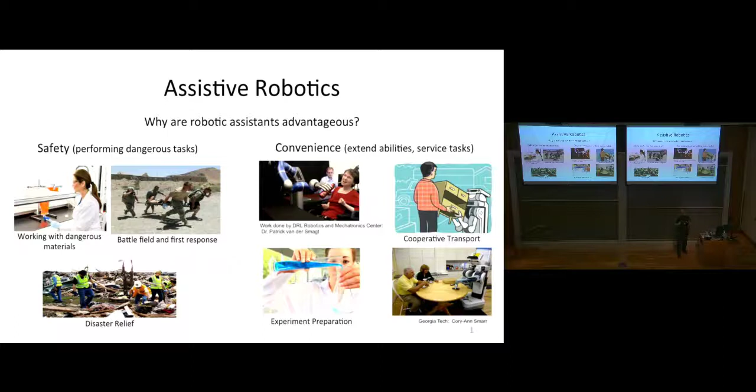So today I'm going to talk to you about robotic assistants and specifically how you can have manipulators effectively be robotic assistants. First I'm going to motivate assistive robotics. Why are they important? You can think of jobs that you want to make more safe. If you want to handle dangerous chemicals, maybe you want a robot that can help you carry something in a dangerous situation, a disaster relief or battlefield. Or maybe you'd like a robot that can manipulate things for convenience. Here you have someone who's paralyzed, and the robot is helping them have a drink of water. You can imagine carrying things, the robot serving you food, or experiment preparation. All of these scenarios motivate why you'd want these assistive robotics. This is actually a pretty old concept, but what they need to be able to do is perform complex tasks. They need to adapt to disturbances and poorly modeled tasks, as well as operate with high performance in new, changing, and dynamic environments.

This next video I'm about to show you was made in 2008, where they had a first robot from the University of Tokyo doing this.

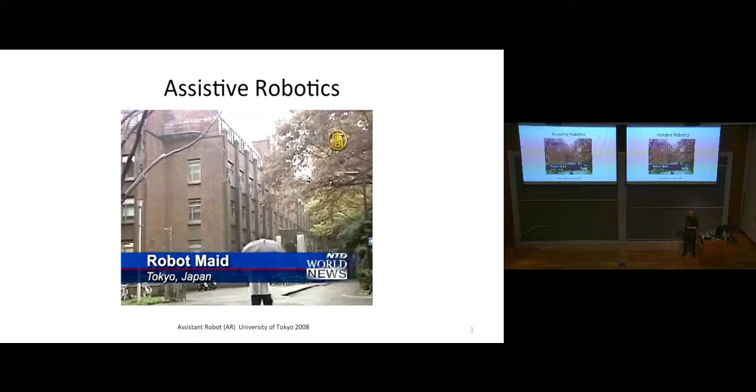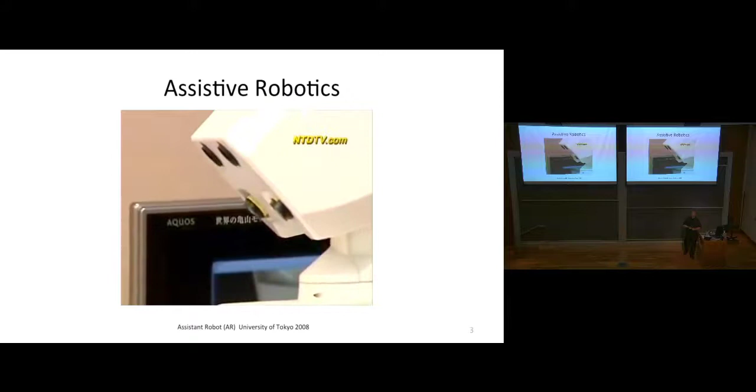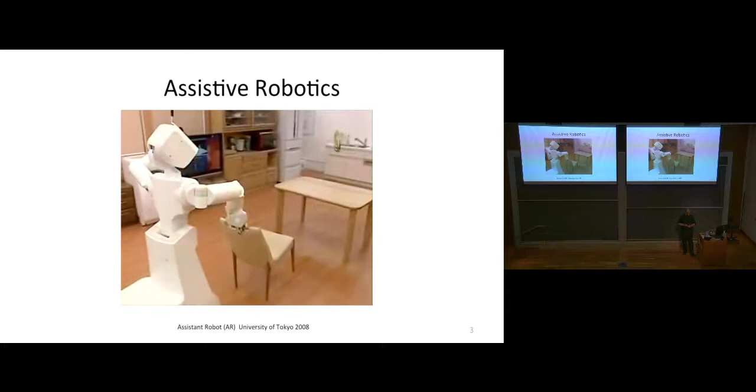Japan's top university scientists are studying the future of household chores, and their solution to mopping, laundry, and cleaning up the kitchen lies in the hands of a robot known as AR, or Assistant Robot. AR has a host of high-tech functions which are possible because the robot can see 3-dimensional objects. This is the first launch of a robot that will be able to help with household chores in an era of an aging population. We can show people we can do it. This mechanical maid is capable of more than just serving breakfast in bed, and at 130 kilograms, it's no lightweight when it comes to polishing floors. But don't get excited just yet. The research center says it'll be another decade or 2 before the 1.5-meter robot can be mass-produced.

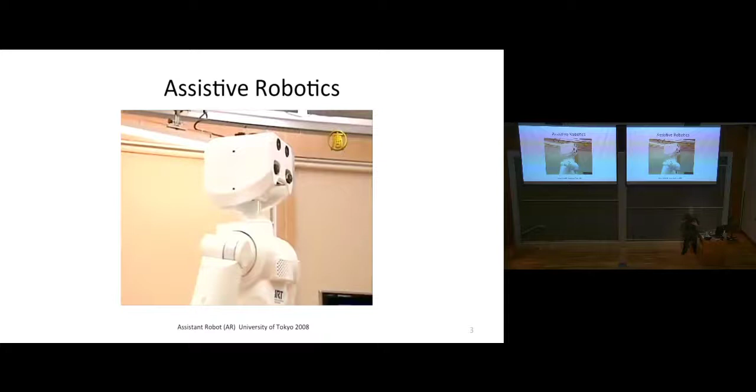So this was a great presentation of motivating why you'd want these robots, helping an aging population. But as they hinted, it wasn't quite ready. So I'll go to this next video.

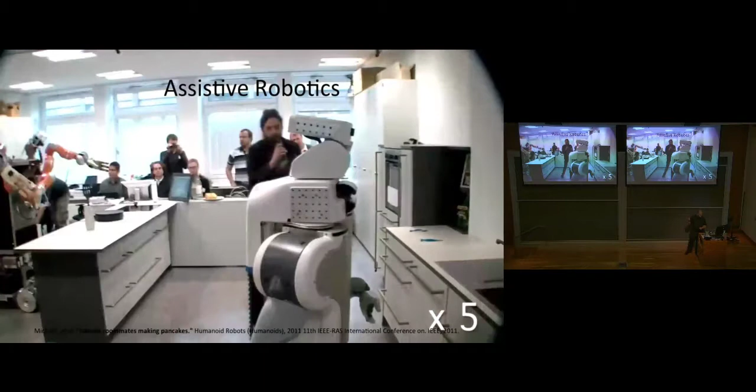Could you use a little extra help? Right, and this is fast forwarding a little bit.

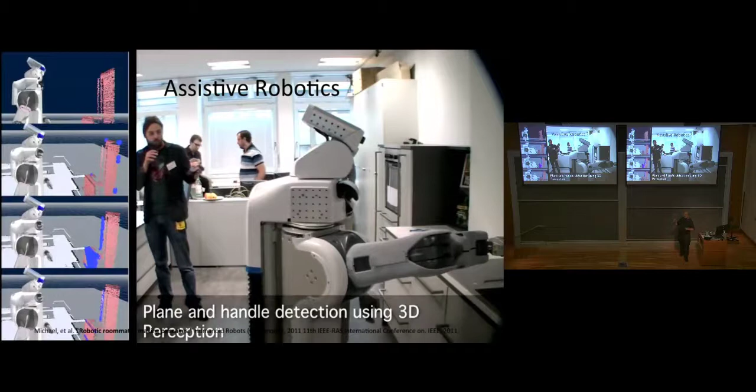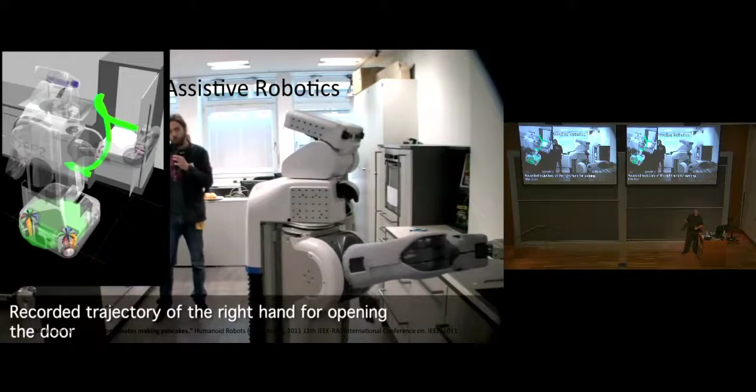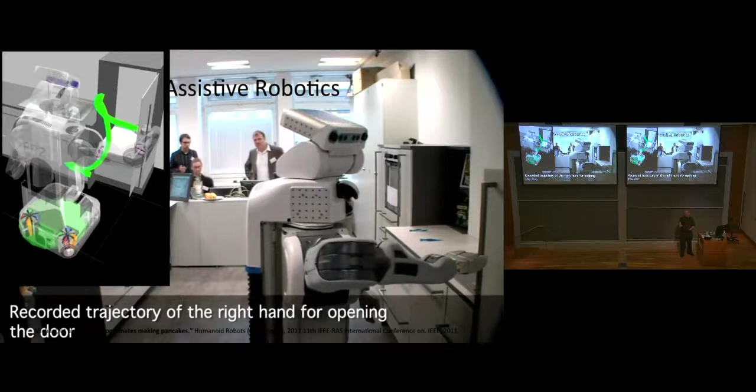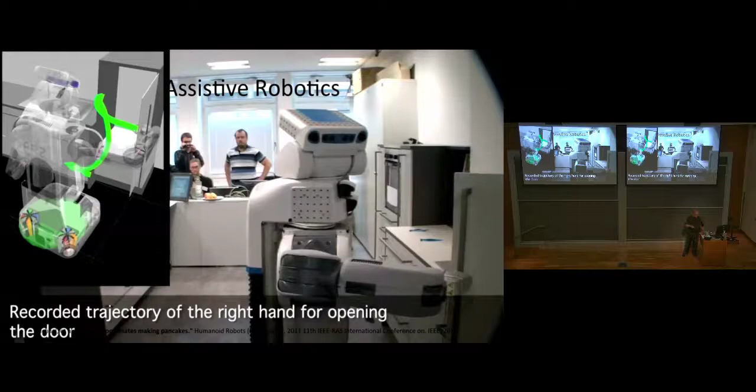So this was done in 2011, and the idea here was to have 2 robots work together to actually make you a pancake. For us, this is a very simple task, but you'll see how much time it actually takes this robot to do it. In this operation, they planned the path for the robot to open the door. As he discussed, they used a little bit of tactile sensing to help place the hand as it gets close, but the majority of the task has been really well modeled. They know where the door is, and they use beacons to help solve this issue. Here you can see the robot slowly open the fridge door after a few minutes, which would be a lot faster for you or I to do. So here, I fast forward a little bit to them having one of the early KUKA arms do flipping of a pancake.

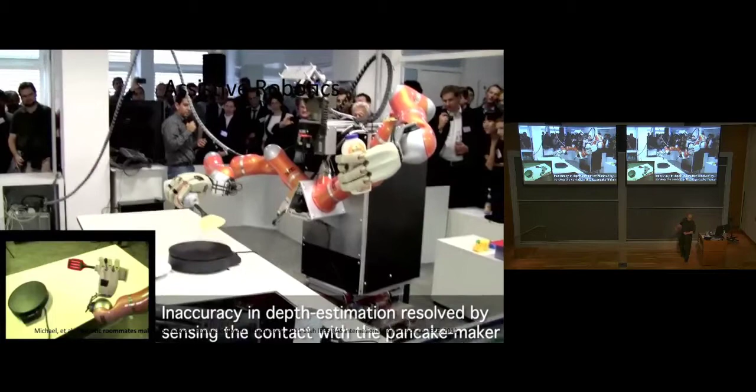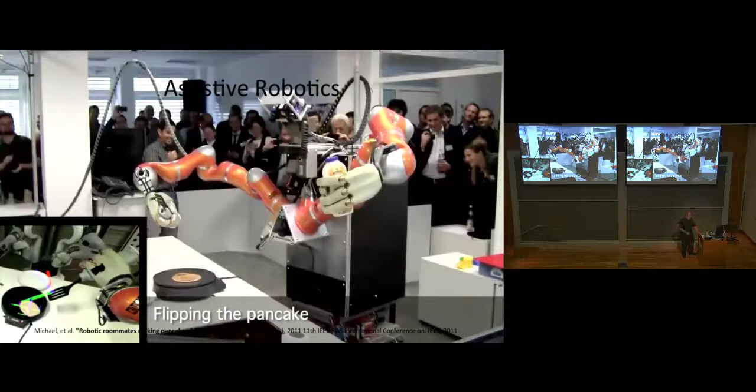They're so excited because we're able to do this seemingly simple task. If you actually work in manipulation, you'll realize that a lot of that was even open loop as they began to do that. They localized the pancake, but after they had it, they took a lot of things for granted when they went to flip it.

So this is a more recent application. At first, Tim was cooking his recipe, and his hand movements were recorded by our digital motion recording system.

And now the robot stirs the melted butter with a spatula. So what happens in this video is a chef actually mimics the motions that the robot arm needs to perform. But if you look very closely, these different containers are actually on little carefully placed coasters that keep them in place, and everything is filled to the right brim that it needs to perform this task.

So if you actually wanted to have a robot chef, it needs to be able to handle a lot more dynamic situations and not simply just repeat the motions or joint feedback that's given to it. So we want to make these systems more complex, more autonomous. So how can we do that?

You can think of many of these tasks that you'd like to be able to complete. And what's really nice is if you solve some of these things, some of them will have overlap between different scenarios where you'd actually want to use it and be applicable to multiple end users.

So we're specifically interested in the wet lab robotic assistant. How can we actually help the pharmaceutical scientists? We were approached by GlaxoSmithKline. They said it would be great if you could have a robot that could be introduced into the lab and help us pick up some of the things we're losing here in terms of time by having a robot that can assist us. So one was having a robot that could actually help prepare these experiments.

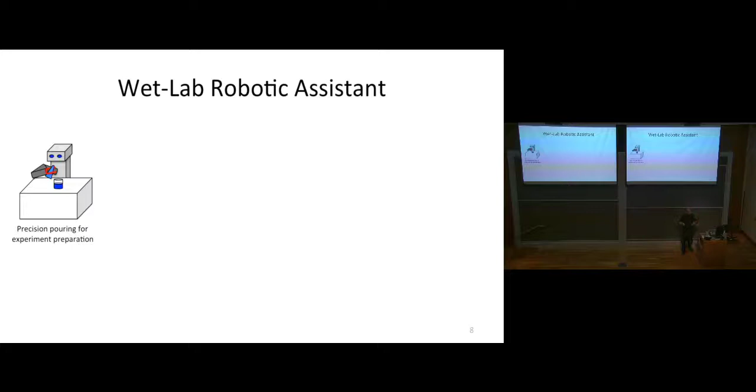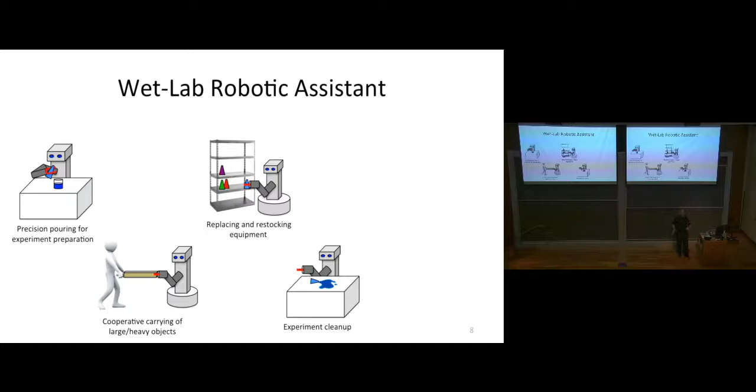Another case you can imagine is having a robot that could carry something in a cluttered environment. You can imagine replacing and restocking equipment, possibly experiment cleanup, as well as maintaining cultures while the scientists are away, for instance, on the weekend.

So in my dissertation, I tried to focus on just these two aspects, and these will be the focus of our talk: the precision pouring for experiment preparation. The main goals here are we want to be able to pour from containers that are already existing in the lab.

You should just be able to roll up and use their containers. You need to be able to pour precisely. You need to be able to pour quickly. And then you don't want to have a lot of tool changes. You want to be able to just use the manipulator you have so that you can transition to another task when you're ready.

So motivating this for the research lab scientists, we were told that when an R&D scientist prepares an experiment, they spend a lot of time simply pouring and mixing these buffers, and this actually adds up to 12% of their time. And when you're handling dangerous fluids, imagine hydrochloric acid or anything like that, it's great if you could have a robot that could step in, especially as the day goes on and the scientists could become more tired.

So thinking about the kind of things we know about the wet lab starting out, a lot of the containers are relatively symmetric. They're easy for people to handle. And generally, the scientists might have a decent idea of the fluids that they could be pouring from if that's what they're doing for the mixology.

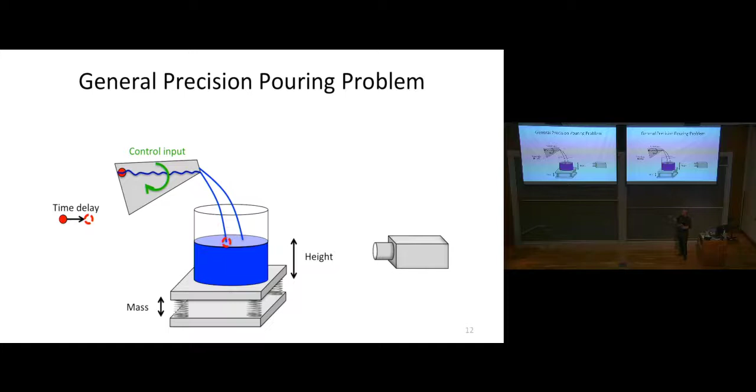So here's the general pouring problem. You have a container that you're pouring from, you have a receiver, and in our setup you have some way to observe the volume inside of this container, either using weight or using vision. And as you pour, this is actually a challenging task because there's a time delay that exists for larger containers, which we'll see in a moment.

But there's a lot of uncertainty at each level of this. How do you actually ensure that you're perceiving the environment correctly? How do you correctly model the task? And how do you model the transition between these tasks? And then how do you design that control strategy to execute that?

So a toy example here is fun. Everyone loves self-driving cars, so here I'm going to take the Tesla auto parking example. Consider this path planning problem: you start at A, you want to navigate to B. You have perception in order to see the cars around you. You have modeling and planning—this is pretty well solved. You have RRT Connect, you can plan one of these planners and get your path. And then you can control and try and move to this position.

However, in the state of the art, still a big challenge is the world is so complex. So how do we extract the state vectors that we care about to do this? Perception in this case is a challenge, but in the future work I'm going to show you—the work we're doing now—even the modeling is also a challenge and not well understood.

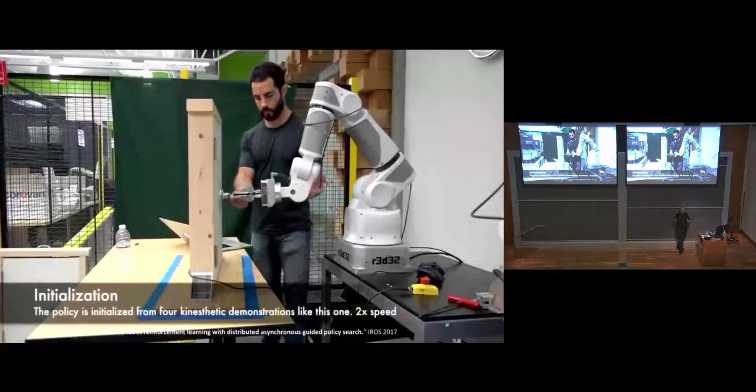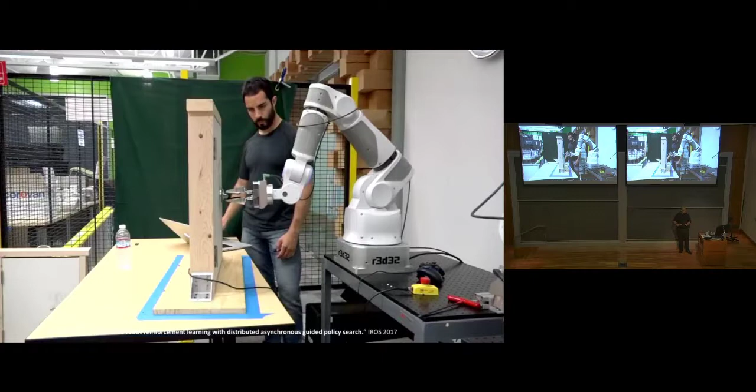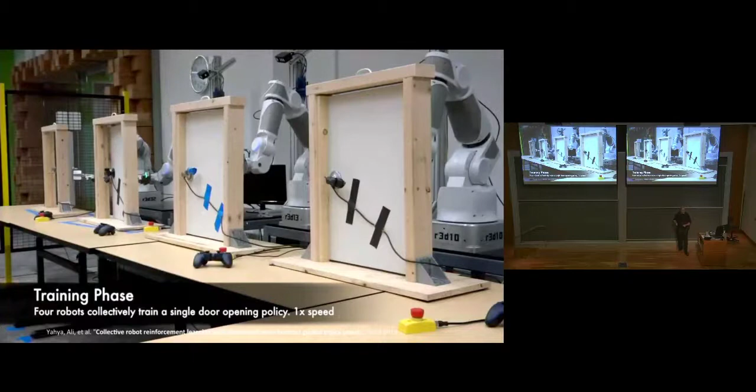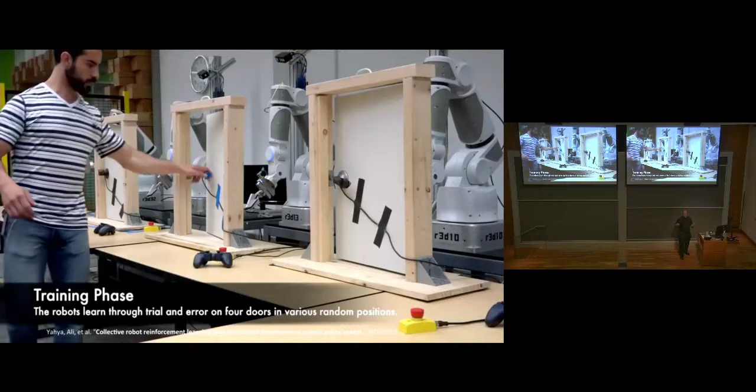So here, he trains the arm on what's the correct action necessary in order to open the door, and then he allows multiple arms to work together to actually open this. Success is measured by an IMU that's on the door handle, and they have a recorded sensing that they correlate with success for opening this door. By doing this, they can actually learn from their mistakes and learn how to do this particular task. However, a challenge they face is how do you actually make sure that this learned ability translates well to the general problem?

So now I want to talk about this in the context of pouring. Imagine you want to pour some acid from container A to container B. This is the initial configuration, you want to navigate to this. But you have to pour a specific amount, and you don't have multiple attempts to do this—if you mix these chemicals, you have one shot.

So how do you ensure that when you go to do this, you're ready to go, even if you've never observed this particular container before? How can you guarantee or give a high likelihood for that success? So to show you how complicated this problem is, I have this cute video.

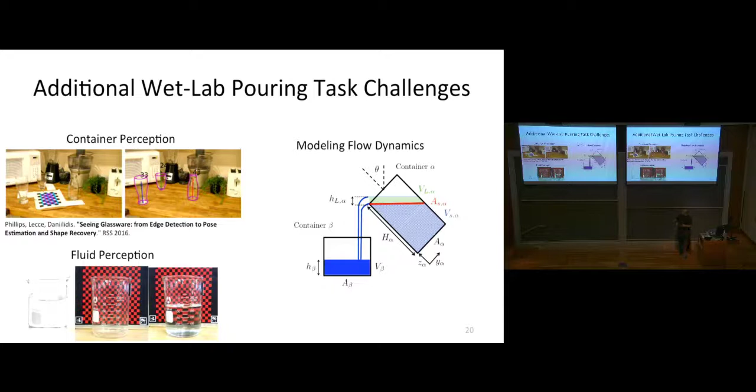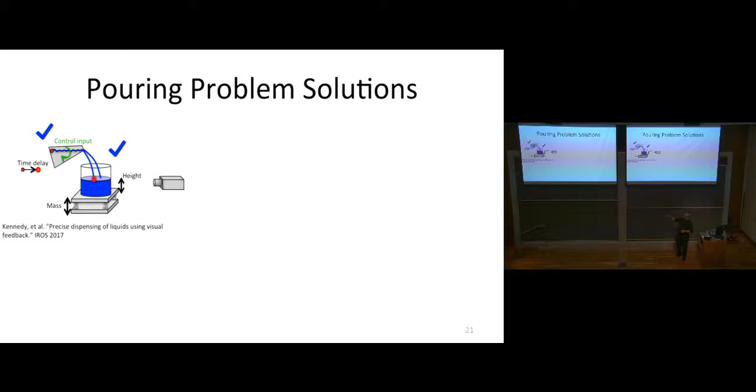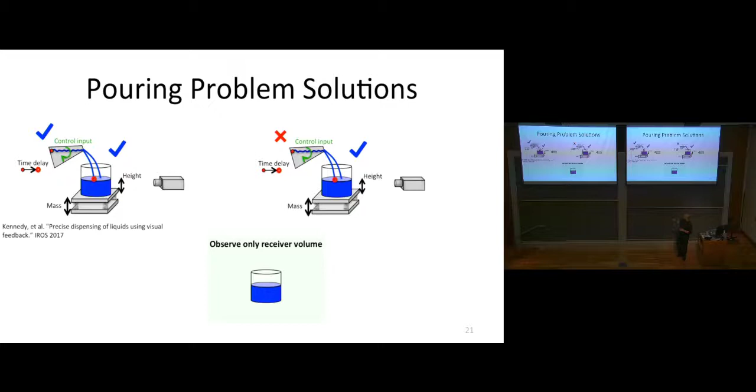I'm going to present the evolution of the work we did here. We started off with: what if we actually knew the model for both the pouring container and the receiver? Then, what if we only knew information about the volume in the receiver, but knew less about the container we were pouring from? What if we could only observe the receiver? And then, what if we could observe both the pour and the receiver's essential geometries?

Starting with the first case, where we know both container geometries, our assumptions are that both are known, no spillage occurs, the volume in the receiver is observable, and the time delay between the container falling and the water falling from top to bottom is known.

Because the geometry is known, we don't have to worry about the time delay since we can solve for it mathematically. So the problem statement is: what is the input u, or angular velocity, required to track the desired volume or height, given the receiver container's cross-sectional area profile?

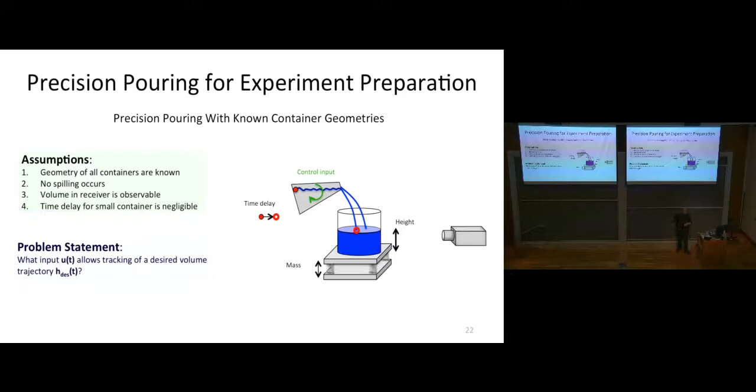Related work includes some done by Dieter Fox. His group looked at volumes in different containers—similar but not exactly our problem—in that he was able to classify 11 discrete volumes and use that for detection, as well as other work where he detected fluid in flight using a camera.

There's also work where they taught a robot how to pour from this exact container, with a target volume to pour into a receiver. This was demonstrated to the robot many times so it would learn how to pour from that container.

Finally, an industrial solution for a robot that helps pour these volumes is the Andrew lab assistant. This one uses pipettes, but it's a very cluttered environment that can't really work alongside a human, and it's not very versatile—if you wanted it to do other things like carry objects, it's really only focused on this one task.

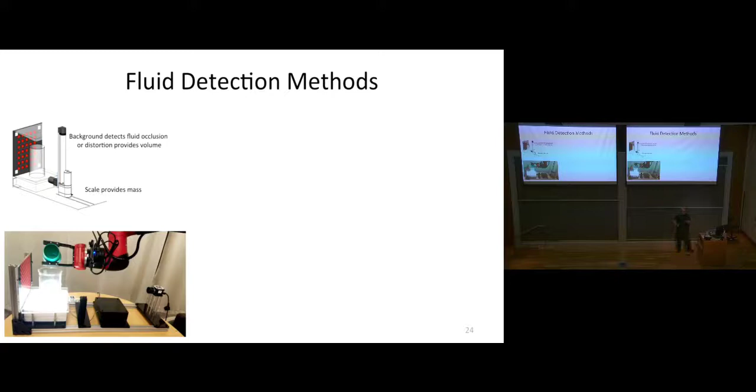For our fluid detection methods, we developed a platform that let us, first, get the mass of the fluid inside the container using a scale, and second, track the volume inside the receiver using computer vision.

We used a neural net—a fully convolutional neural network—that was able to take in that information and extract the water pixels. We combined these in a Kalman filter to extract both the mass and volume of the fluid inside the receiving container.

In this work, we used an MV BlueFox camera, the Rethink Sawyer robot, and a container that's actually square—this was because it was easy to model the flow from this shape.

So this is the original problem: if you have a time delay in the system but can account for it, then you have the height above the container, which determines how the fluid leaves it. You have the fluid below the surface of the lip, and this pours into the receiver. These volumes are captured in two equations—one for the cross-section of the receiver, and one each for the volume above and below the lip.

Doing this, we can model the flow rate of the container by differentiating our original flow rate model in terms of these parameters—the cross-sectional areas, and the derivative of volume with respect to the angle as it rotates while entering the receiver.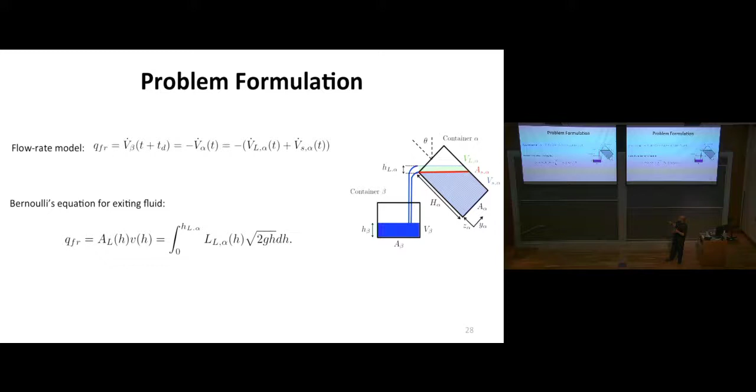With a known container geometry, we specify the container parameters: the length parameter on the container, the height above the pouring lip, the main height of the container, and its width and length on the side.

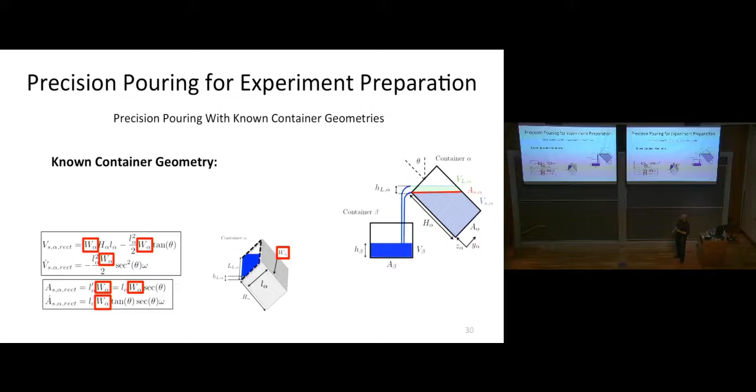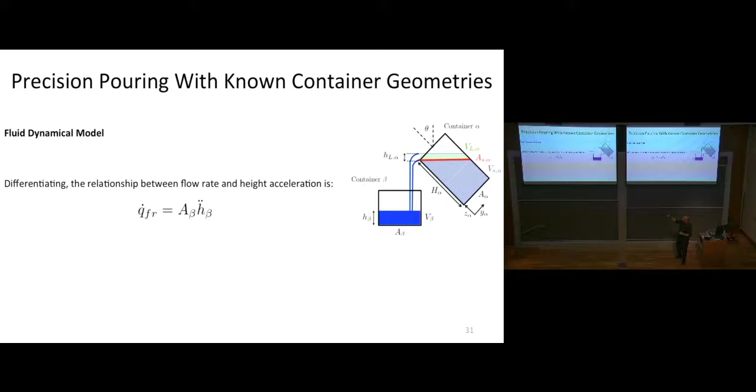With this information, we can begin to differentiate this model and estimate what the volume flow rate would be. Differentiating that flow rate model from the previous equation gives us this single line here.

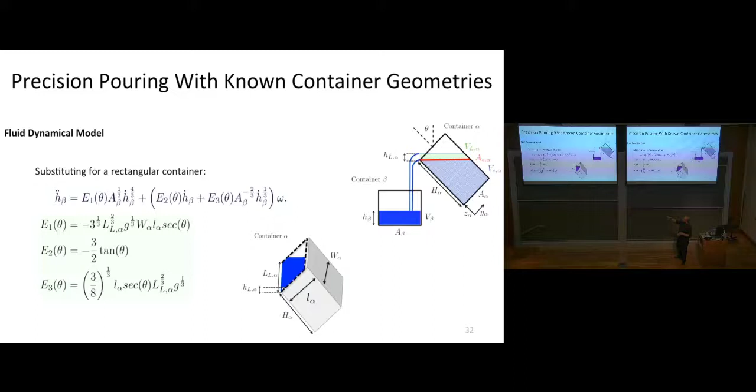So if we expand this and substitute our terms, which you saw for the container geometry, we have this as our complete dynamical model when we know everything about the container. So if we define our state space here as the height, the derivative of the height, and the angle of the pouring container, then we can write the equation we just saw in terms of this dynamical equation: x dot equals f of x plus g of x u. It has that really nice form.

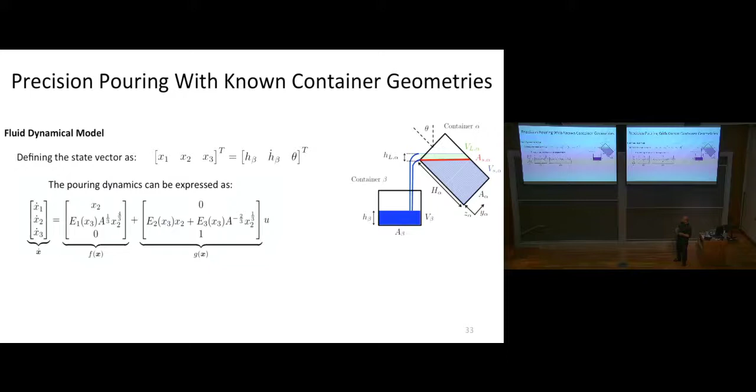And we care about the two outputs: the height inside of the receiving container. So if we define our error in terms of this output, the height and its velocity, we can specify a trajectory that is a fifth order polynomial, so it's very smooth as we pour to minimize sloshing inside of the receiver. And if we have the model in this form, we can show that it's actually linearizable.

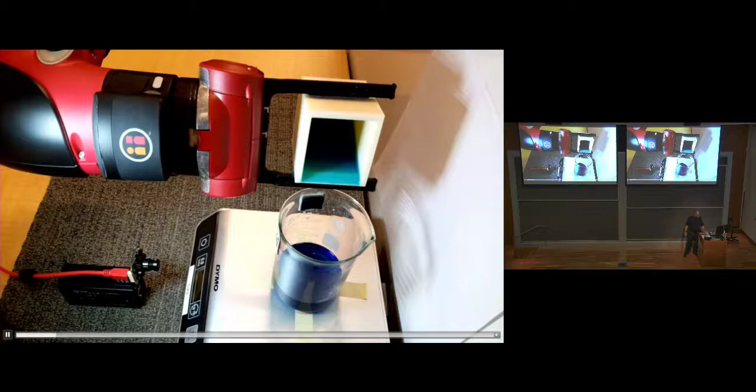So here you can actually see the robot begin to pour. I can speed this up.

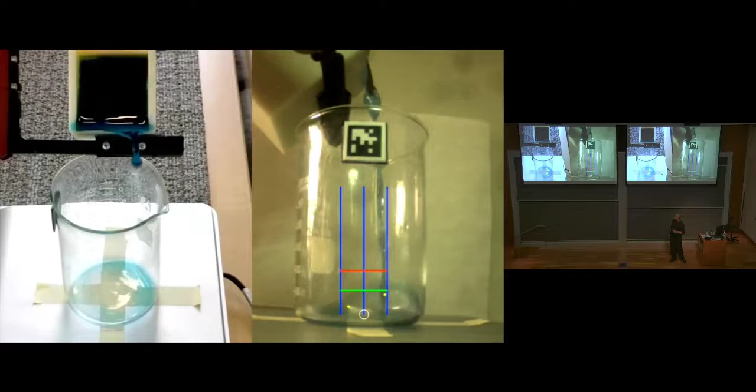So here initially we had to have the fluid as blue because we used background subtraction. But then in our later work you'll see that we applied that neural net to detect the fluid, and you can see that it's actually able to detect clear fluids of any transparency when you leverage the distortion of that background. So here we're actually able to pour very aggressively and quickly.

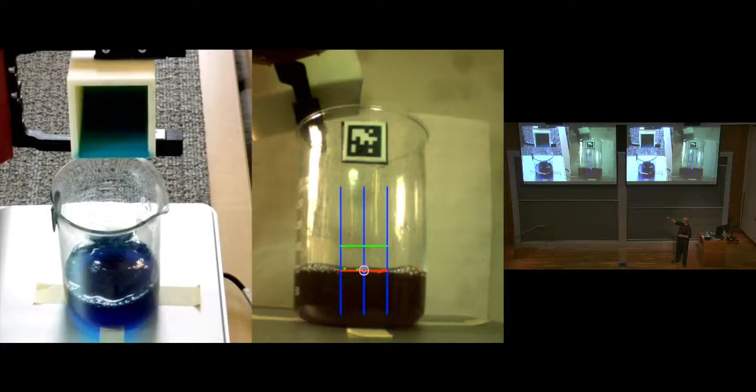The red line is the target line that we're trying to reach, and then the green line filters the fluid above that, and we're actually able to detect what we believe is fluid entering versus fluid rising, and use that to detect the mass or volume inside of the container.

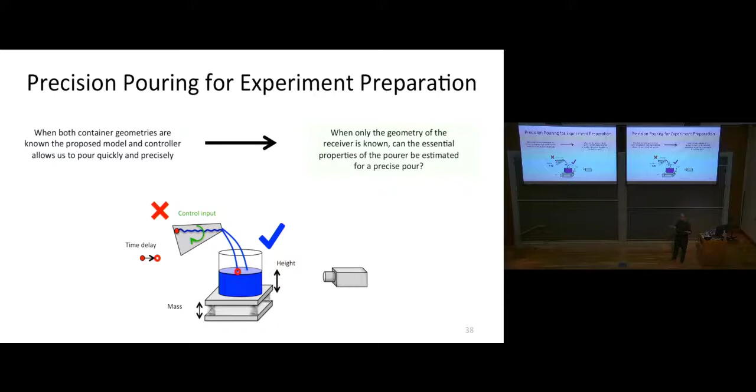All right, so this is the case when we know both the pourer geometry and the receiver geometry, but what if one of these is unknown? What can we do in that case? So we're going to move now to the case where we can only observe the receiver volume.

So here we adjust our assumptions that only the geometry of the receiver is known, no spilling occurs, and the volume in the receiver is observable. So then, given these essential characteristics, can we actually track the U that gives us the height that we want inside of the receiver?

So here the time delay is important, but in this stage of the work, we actually assumed that it was constant, so about a second. And then we actually showed that the results weren't great, because in reality, if you saw, remember when she poured the milk, that actually can vary depending on the angle you're holding it. And so later we learn exactly what that is.

So taking the derivative of both of these volumes, here we can actually restate our volume equation. Again, this is similar to the dynamics you saw on the previous slide. And then we have, again, we're looking at the height inside the receiver. We can actually say, if we have this time delay, that the future height can be observed by integrating all the actions we've done until this current point.

So this is our previous height. These are all of our actions up until the current time. What do we expect to occur based on everything that we've poured and acted up to this time, given our knowledge of the container? And so, in order to do this prediction, we need to estimate this derivative profile of the maximum volume profile.

So what is this maximum volume profile? Given a container, if I have the maximum volume it can have at this particular angle, it should describe some curve in this manner. So what's the max volume versus the angle?

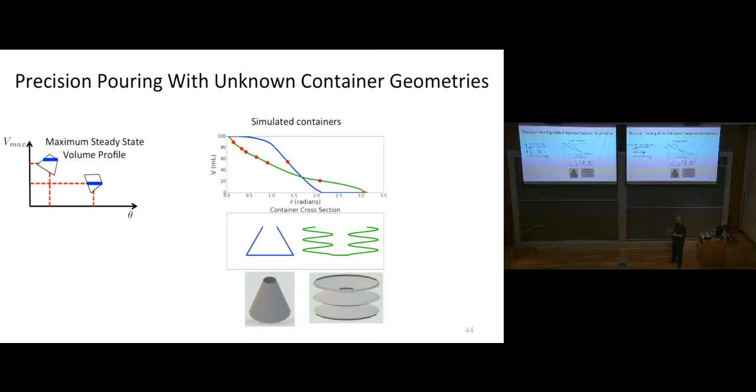So what we want to do is actually approximate this volume profile. In this work, we said okay, we're only observing the receiver, so we need to leverage information about all the example pours that we've done. So what if we model this with an orthogonal basis? We used a Legendre basis, but you could use any orthogonal basis.

What was great about this was it allowed us to use the coefficients to represent the containers as a point in space, right? So containers that are similar in geometry should actually cluster together, and then we can use that information, if we normalize them, to predict how we expect our current container to pour simply by watching how it behaves in the receiver.

So here's the objective function that we try to minimize. As we begin to pour the fluid, we're trying to approximate that volume curve. This is done with this residual. We have this weighting function which says okay, initially if I'm actually just starting to pour, I need to really trust the examples that I have, which were those practice pours. But as I pour more, I can begin to trust more the system identification as I continue to pour.

So here we have a similar state space. Our dynamics are slightly simpler. Here we have again the area of the receiver. This is the dV d theta. And then we have our output, which is just the height inside of the receiver. And we want to actually track this error at some future time.

And we show that the system is input-output feedback linearizable if these conditions are true, and they're pretty straightforward. So then here is our objective function. We want to track that error as well as optimize and figure out the container geometry at the same time, subject to the system dynamics.

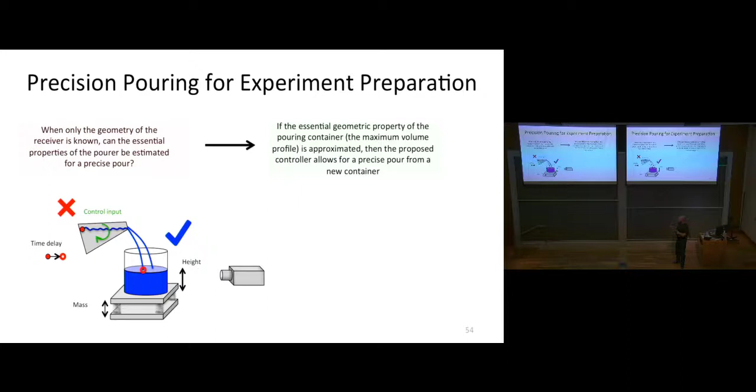We've been able to show that if you can actually see the volume in the receiver, then you can approximate that information and pour precisely. But there were some tricks involved—the main one was that as we did this optimization, we trusted these models initially, but as we continued pouring, we began to trust system identification more. So there were a lot of terms inside that optimizer we'd have to tune to make it adaptable to any system, and that's disadvantageous.

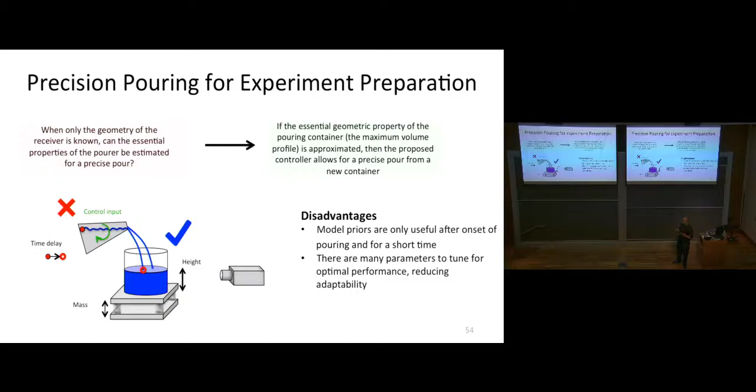So how can we actually improve this? This is what our latest work has focused on. Now we'll focus on: what if you can look at the pourer as well as the receiver? What can you say in that case?

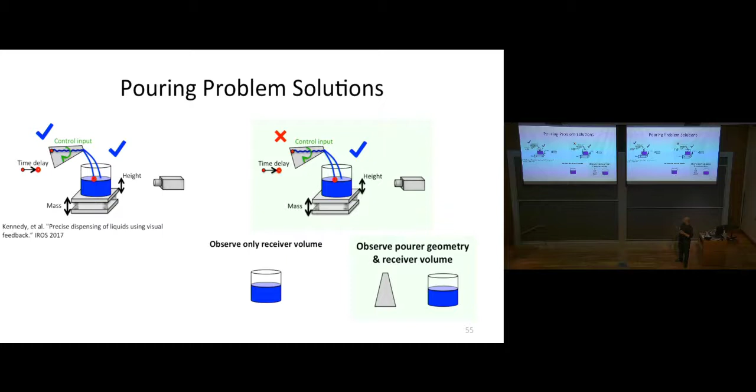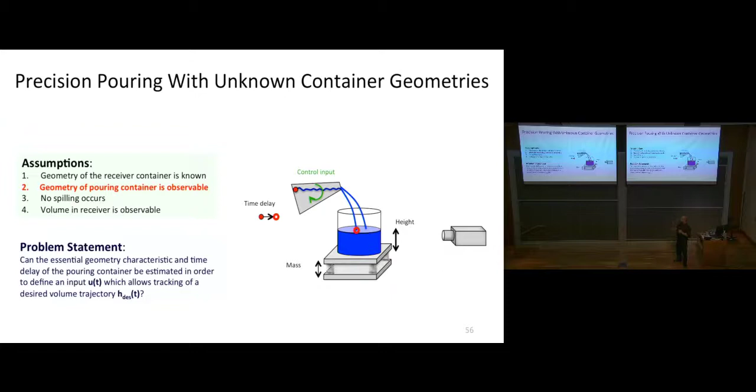Here, the key adjustment in our assumptions is that the geometry of the pouring container is now observable. Now what can you do? You have a similar problem statement: you want to find the input velocity to reach that target volume.

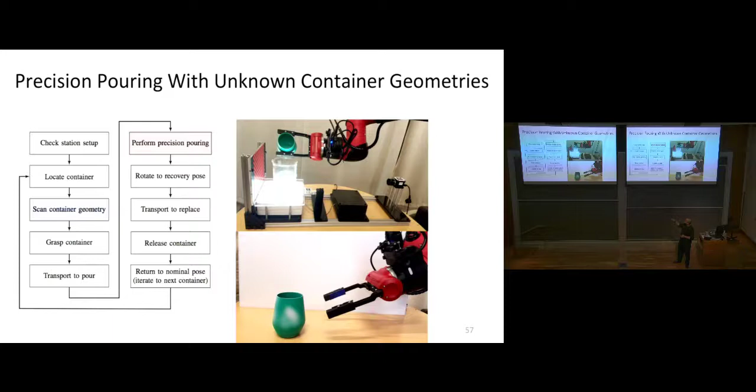Here's our full system state machine as it matured, and we'll have a video showing this done at the KUKA Innovation Award. The highlighted parts here are the scan container geometry and performing the precision pouring. Here's our complete setup: first, the system scans the container, and then it pours it inside our objective.

Now this is the simplest form of this dynamical equation. Here you have the time delay in the receiver after some time TD—you need to know what that is. This is the velocity in the pour, and we're going to use this notation to represent that volume profile, V sub theta, and this is its first derivative with respect to theta, and then this is our angular input.

So now if we want to think about what the time delay is, we can think of it as a function of the container geometry, the angle at which we're pouring, as well as the angular rate at which we're rotating. Our objective is still to track some desired height in the receiver that we specify.

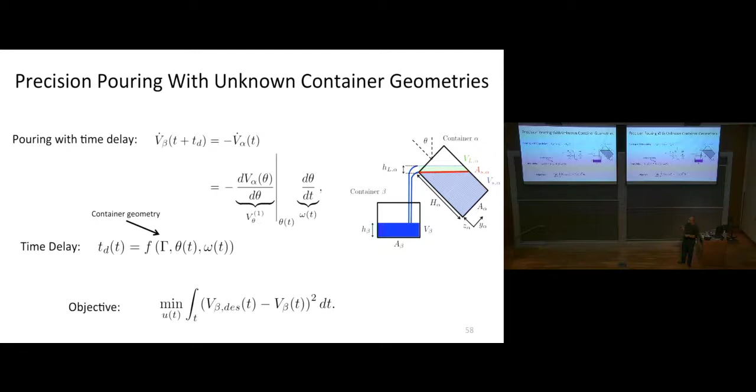For actually extracting that container geometry, we have the sensor setup here. We have a time-of-flight sensor, the PicoFlex. It's able, if you have the right color for your container—here we had to use white paper—to get a really nice point cloud. If it has the wrong material, sometimes it's actually spotty, so we can continue to improve that.

With this, we're able to extract the point cloud and reconstruct the geometry of the container by estimating a set of cylinders at different heights. After getting RANSAC for the table, you get the table normal, and then you subdivide that and group these points together. You can construct these cylinders and then fit a Gaussian process to this.

What's really important to note is that when we fit these curves, which is useful for comparing, we always fit them with the same number of points, 128 points, spread out over the height of the container. This is useful for comparing against simulated containers, which we can also get and extract that profile for.

So here we're actually pouring some fluid inside of NVIDIA FleX. We have the same particles, but then you can render this with the fluid. If we have thousands of these containers—we poured 3,288 of them—then what we can say is, what are the top 10 containers closest in geometry to the container we're pouring from? After we extract our profile, what are the closest ones, and what percentage match are they?

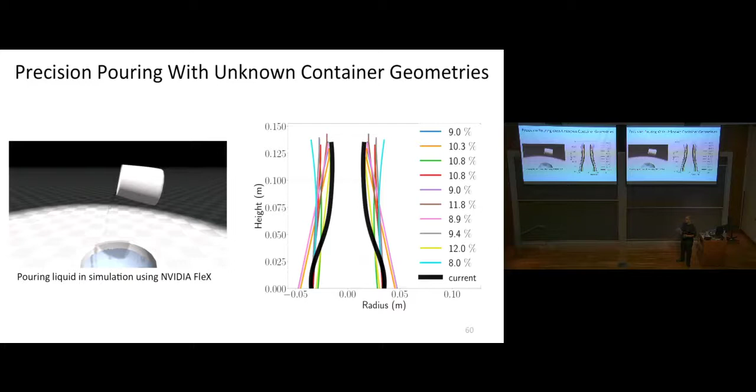Once we have the profiles from these simulated containers, we can use a mixture probability to estimate how we believe our container would behave if it was actually close to these simulated containers.

Here's our control diagram. We have the model which we're trying to estimate—what is that volume profile, what is that time delay? If we can estimate those, we can control our input to reach that target volume, where error is defined as the difference between desired and actual volume.

We want to effectively combine online system identification, which we did in the previous work, along with sufficient model priors that we can use from the beginning to help us pour quickly and precisely.

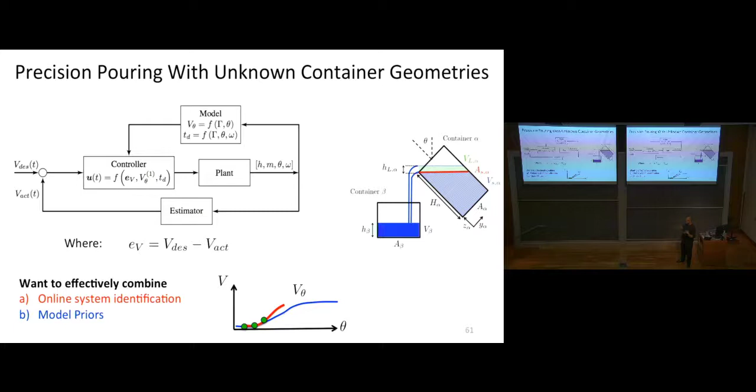So for system identification, now, because we're actually going to do this in a different space, we transition to power series. It's not necessary that the coefficients be orthogonal. And we want fitting for the system identification that minimizes this objective function. So again, minimize that residual as we pour.

We want to have a regularizer so that our curve doesn't diverge. And then we want to have soft constraints because the physics say as you pour it into the receiver, the volume should never go down, it should only go up.

So then for the Gaussian process side, if we want to compare these different methods, we don't have to use just the online system identification. What's the model prior aspect here? We use a Gaussian process.

So here's the kernel that we use. It's a combination of a radial basis function with white noise. And the variance here is a function of how well our container fits to the container that we're comparing it to. So given this information, we can define these covariance matrices, which are a function of the angles for both of these, the training and the test container.

You can then construct the information matrix, and this is textbook, and then you can actually have this non-parametric estimate where we combine each one of the fitted volume profiles using this mixture probability that we obtained. And this is in addition to accounting for how close we are to the container.

So if we're really far from the container, this variable becomes very large, right? And then this kernel gets very large and there's disassociation. And so you'll converge to your mean in that case. And if you're very close, this will become very small and you'll be very tight to your mean. And this gives our new algorithm the ability to be very adaptive.

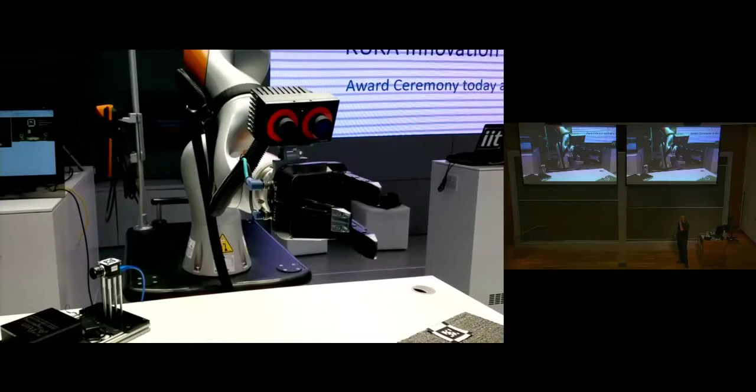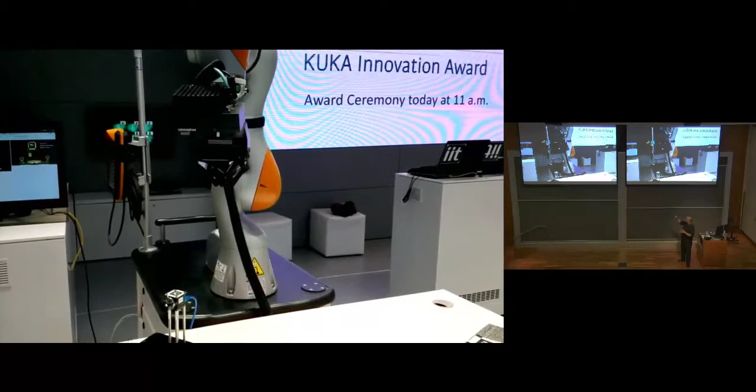KUKA Innovation Award. We scan the geometries, begin to pick it up, and then pour it. In the interest of time, I'll show you the main video, which you might have seen before.

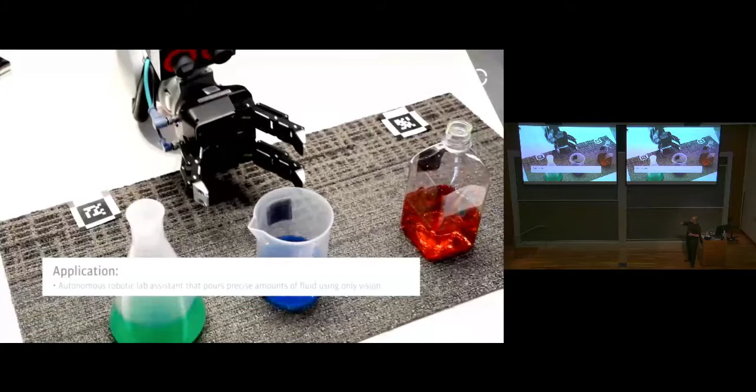They did an amazing job with the video. You have an interface, you select how much you want to pour, it scans the area, picks up the container of interest, and transports it to the region where you want to actually do the pour. You can see our system set up here, and in a moment you'll be able to see the output.

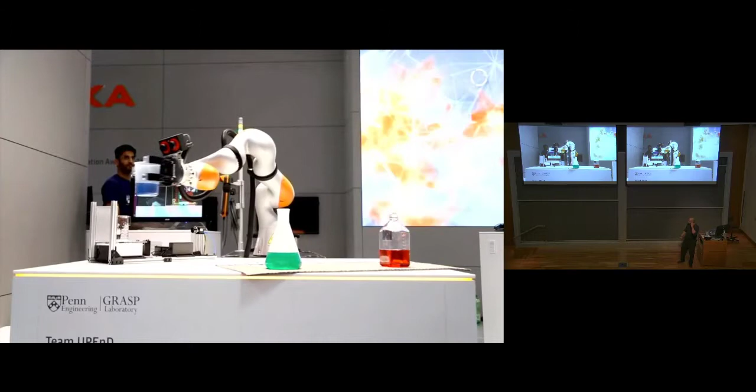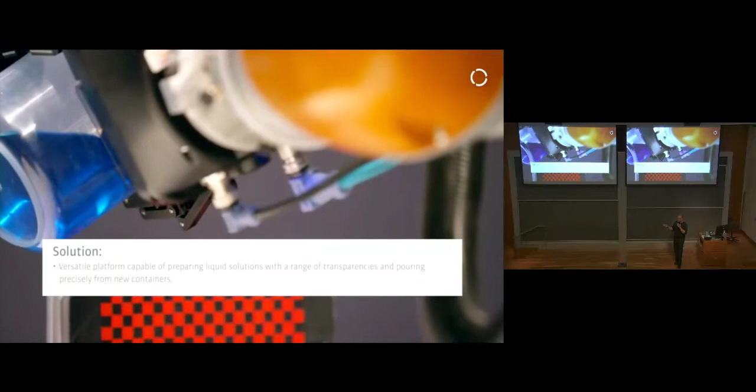So it begins to pour, initiating that pour. Once it figures out what it's doing, it begins to speed up, and it actually looks like a person would — it starts to pour, then backs off, then figures it out. But every single time, we're able to pour precisely using this system identification.

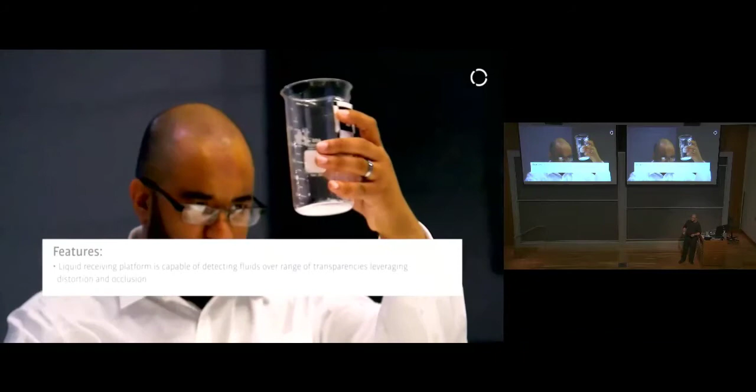And then we simply motivate why this is good for a scientist. I've been told that I look like someone off of Westworld, but we'll ignore that.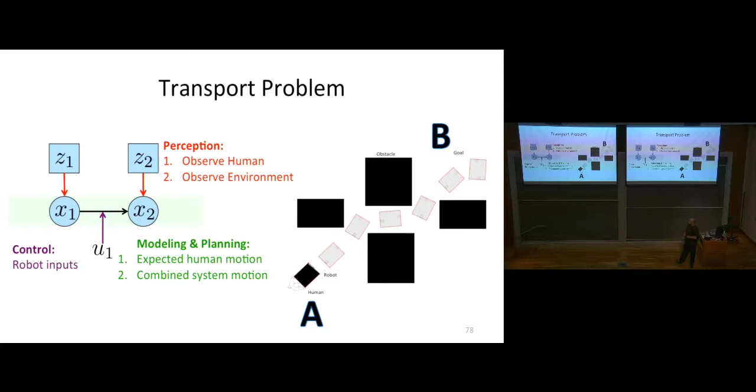So, transitioning quickly to carrying. This is another useful task we could have the robot do. Again, we consider this scenario: you need to measure your environment, observe the human, model the human, model the combined system's motion, and then figure out what the robot inputs should be in order to execute that motion.

So if we wanted a robot to help a human carry something like this, how could we actually give the robot the ability to know what to do in a similar fashion?

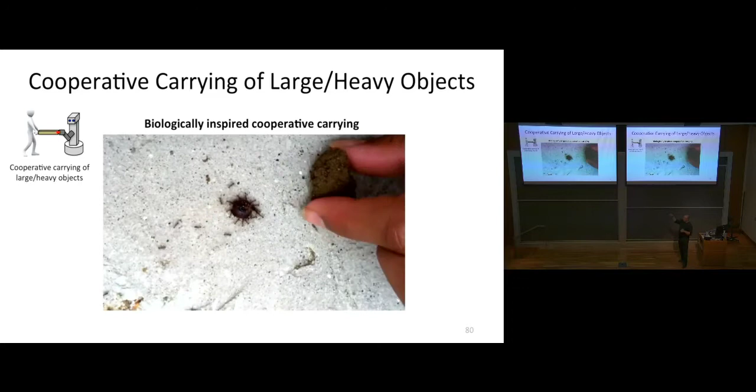So our first step was to actually look at how ants would do something similar. Here you see all of these ants carrying this thing, able to avoid obstacles — the ones closer to the obstacle are like, hey, back it up, and they're able to push it and navigate without striking that obstacle as they move toward the nest. So, ants can do it, we can do it, so robots should be able to do this.

So these interaction forces, or the stresses they're producing on this object, they needed to minimize, and if they could do this, that kind of defined what optimal transport is. So we define optimal transport as going from pose A to pose B while avoiding obstacles and conserving energy.

So the first step of this is, okay, let's say I knew where I wanted to go — how do I actually plan the most logical path to get there? This is a good problem, and we did work here that actually augmented this by having a system.

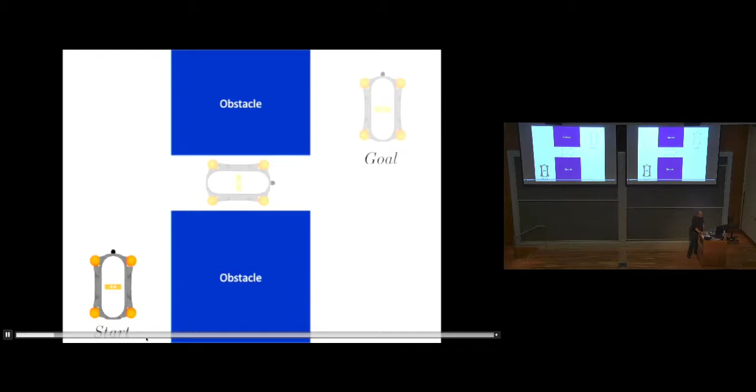If I can fast forward to the part here — that allowed us to construct safe corridors that the robot could traverse through, which really lent itself to the path the robots were trying to follow.

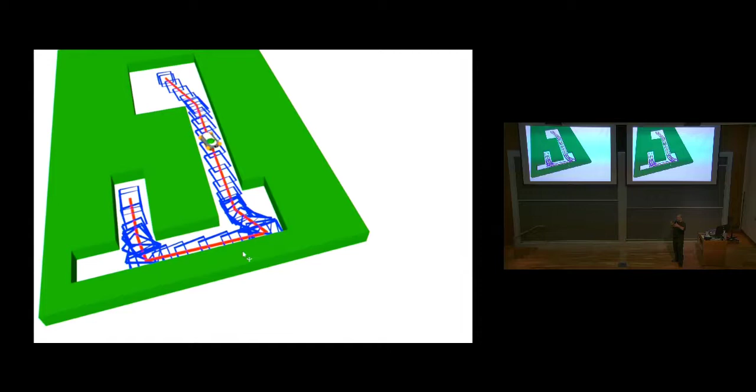So here you see each one of these nodes generated from a seed path generator — you can imagine like a sample-based planner — and then you construct these overlapping convex corridors, and you can plan nice, smooth, optimal trajectories in that space using those corridors. So if you know where you want to go and you know your complete environment, you can plan a safe trajectory to get there that doesn't have any collisions.

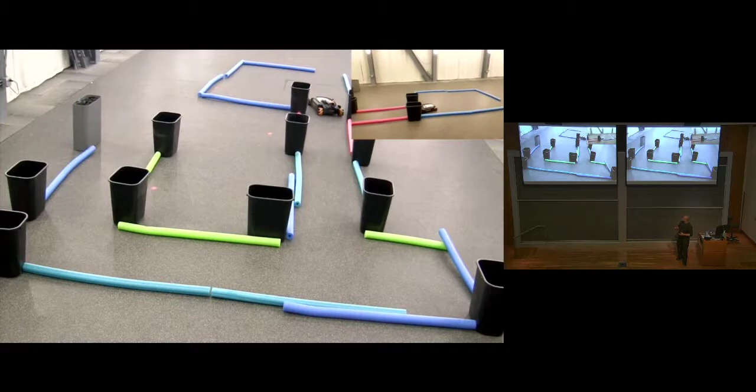Given these interaction forces, we want to minimize them in order to be optimal. Work done by Vijay and Waldron showed that if you have this wrench, you can look at the interaction forces, and if you make them all reach consensus on this coefficient describing their force, then their interaction forces will be zero. We wrote a paper showing that if robots can talk to each other, they can reach consensus on this vector and eliminate interaction forces, which is really good.

Toward this end, there's a lot of related work on robots carrying loads using compliant transport. But in all these examples, some force has to be applied to make the robots move. If they want to be intelligent and approach optimal transport, and could guess where the human wants to go, then the stress can go down as they navigate, in addition to being compliant.

So these are the assumptions: the human knows where they want to go, they don't want to collide with any obstacles, and the human wants to conserve energy, which implies minimizing stress on the system. So how can the robot observe the human's optimal transport when explicit communication is not available?

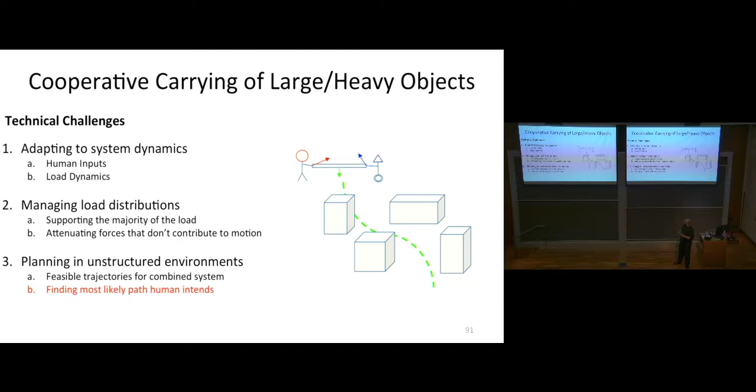The technical challenges here are that human inputs and the load dynamics need to be modeled, the robot needs to support the majority of the load, and then you need to find the most likely path that the human intends to follow.

Toward this end, we began to think about what kind of things would be useful for the robot to extrapolate these necessary quantities. One thing we thought of was looking at the direction the head was pointing. We could also look at the way the step vector was pointing as the person walks, and then look at the surrounding obstacles.

If you imagine transforming this to a map, you can treat the image map as an input for constraints on where you could go. Each of these things could influence the second derivative of where you believe the system will go, and you can integrate that twice to extrapolate where you think the human intends to go, based on acceleration. So the step or the head describes how you'll accelerate based on where you're looking, so you're going to go in that particular direction.

So we began to do this, and said, okay, it's actually extremely difficult to model, as you can see from the previous slide. What parameters do you choose? What form should you choose? How do you know it's correct? Do you need to have multiple models to do this?

One thing we thought was, how about we just try to see if we can learn from how humans do this? So if you have all these inputs and can extrapolate a map, we have a sensor that allowed us to extrapolate the wrench, the head vector, and the step vector, and then see how two humans would carry this. We did this on a range of maps.